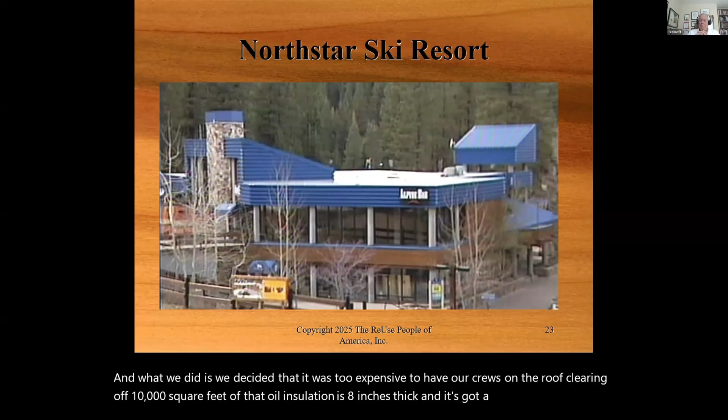We decided it was too expensive to have our crews on the roof clearing off 10,000 square feet of insulation that's 8 inches thick, with a rubberized base and a rubberized top. Our whole crew would be up there for almost a week just trying to clear it.

We did the calculations, got an engineer to support it, and were able to put a bobcat up on the roof with the driver. We cut a hole in the roof in one corner of the building and put a 40-yard roll-off below it. We had the entire roof scraped off and ready to start deconstruction by the next day.

Going back, because that was built on a 16 by 16 foot grid, we cut the roof off from the top in 16 by 16 sections, right over those columns. We did the same thing on the second floor, then used a 40-ton crane to come in and pick that floor section up and set it on the ground.

That way, other people could be working other parts of the building while we were deconstructing, without needing safety equipment and fall protection in that area. Obviously, we still had hard hats and that sort of thing, but it certainly improved the efficiency of the operation.

It was a restaurant, childcare facility, and ski rental shop originally, as I mentioned, 20,000 square feet. We charged $134,000 for the deconstruction, and we deconstructed it down to the concrete poles and the concrete slab it was based on. There was no appraisal of the materials because the ownership structure made it too difficult.

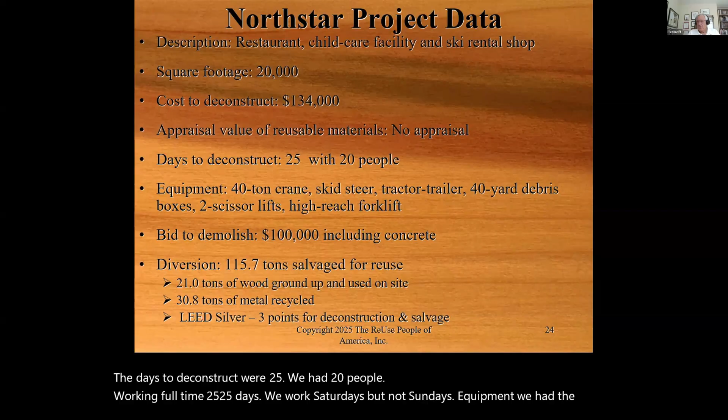The days to deconstruct were 25. We had 20 people working full time, and we worked Saturdays but not Sundays. For equipment, we had the 40-ton crane, and you could see the rest of the other equipment — high reach forklifts, scissor lifts, etc.

The bid to demolish was $100,000, so we weren't far off, and that's typical. In the residential sector, deconstruction is 2.5 to 3 times more than traditional demolition. It's nowhere near that in the commercial sector — 1 to 1.5, maximum 2 times more.

What else? Oh, there's a diversion. We had 115 tons salvaged for reuse. In addition, there were 21 tons of wood ground up and used on site as mulch, since they wanted to protect it. And there was 30.8 tons of metal that was recycled.

The organization received a LEED silver rating for that project, primarily because of 3 points they had gotten from deconstruction.

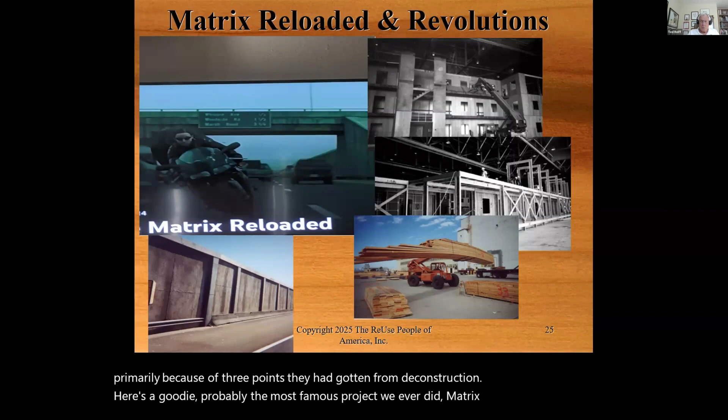Here's a goodie. Probably the most famous project we ever did: Matrix Reloaded and Revolutions was filmed in the county of Alameda at the old Alameda Naval Air Station, which had been decommissioned. This was filmed on the old runway — they blacktopped it and put the road markings on it. There were 3 major sets; I've got photographs of just 2 of them here.

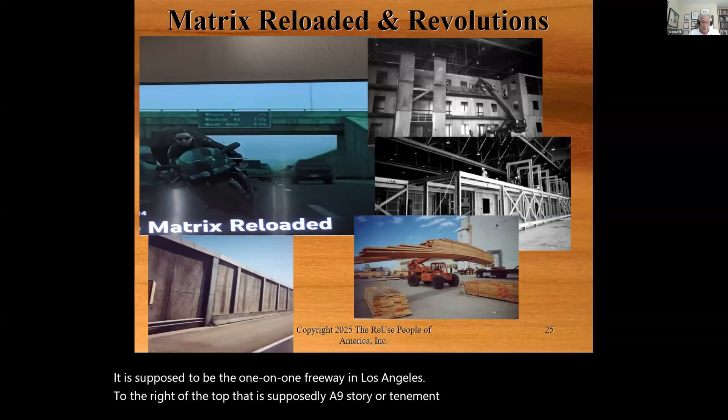Obviously, the one on the top left is right from the movie — it's supposed to be the 101 freeway in Los Angeles. To the right at the top, that's supposedly a 9-story tenement building where our hero Neo was fighting Agent Smith in one of the opening scenes. Smith was duplicating and triplicating himself, but of course our hero won.

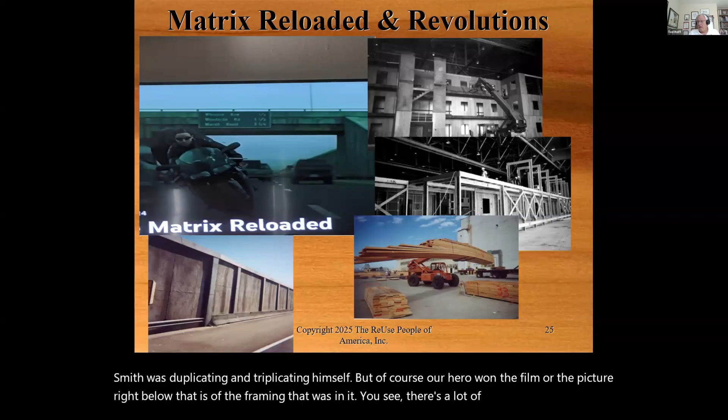The picture right below that is of the framing that was in it. You see there's a lot of truss joist in there, and the walls were strictly Luan over 2x4 and 1x4 framing, so there wasn't anything particularly solid except for the flooring, obviously.

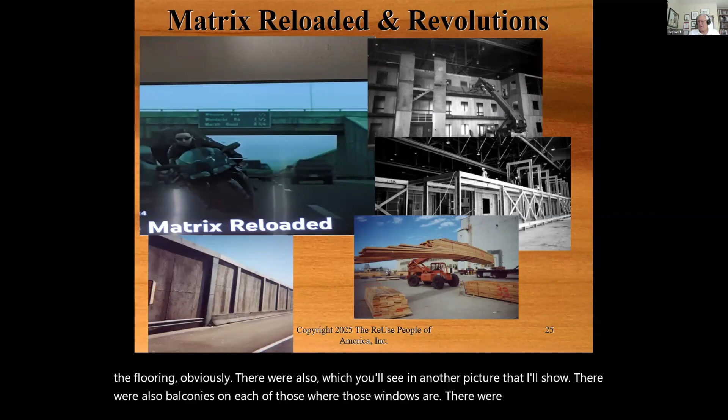There were also, as you'll see in another picture I'll show, balconies on each floor where those windows are — steel balconies. I think there was a total of 35 or 40 of those steel balconies, which we did salvage.

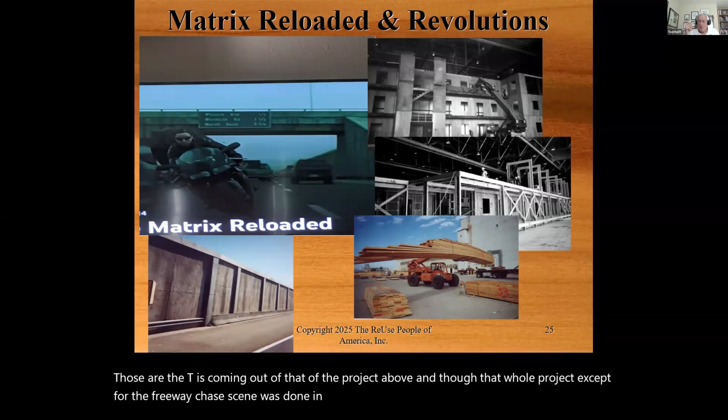Keep an eye on that bridge up above in the upper left. Oh, I'm sorry, in the bottom right — those are the TJIs coming out of the project above. That whole project, except for the freeway chase scene, was done in one of the hangars where they built, rebuilt, and refurbished the military aircraft.

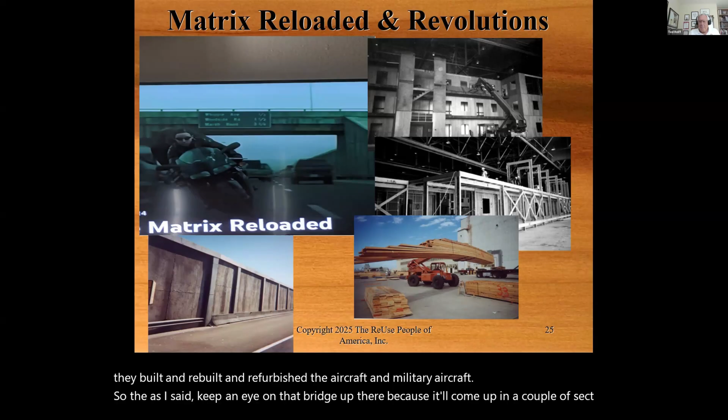So keep an eye on that bridge up there, it'll come up in a couple of sections. Below that looks like a concrete wall. It's not, it's OSB sprayed with gunite. They're built in 16 high by 16 wide sections, made of 2x4s, but the 2x4s were notched for 1x, which I'll probably show in another picture here.

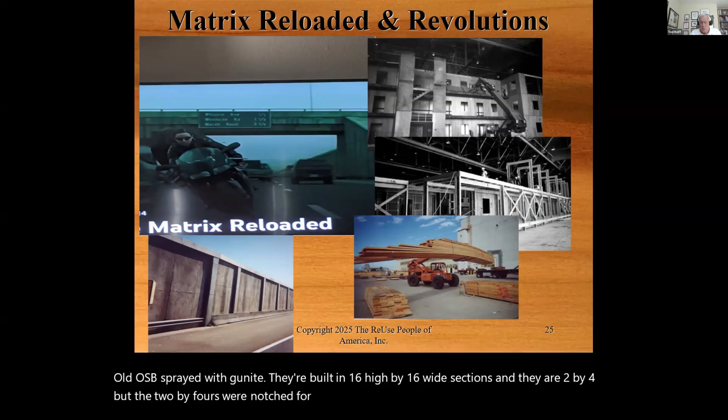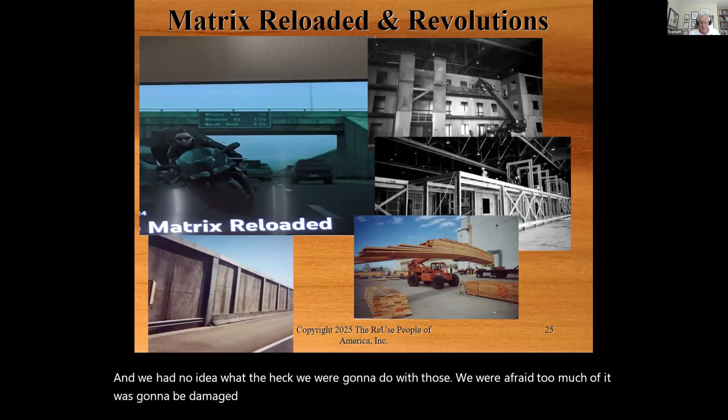We had no idea what we were going to do with those. We were afraid too much of it was going to be damaged. But somebody had an idea, and it wasn't me. I wish I could claim it.

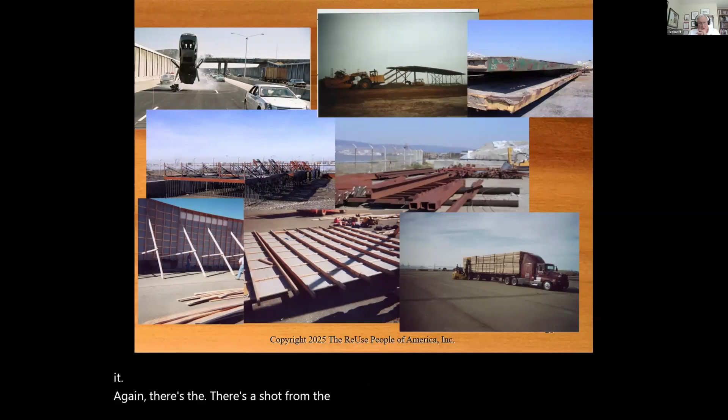Again, there's a shot from the film in the upper left. You see those concrete barriers, supposedly, and the bridge in the back. If you notice, right on that car that's flipping over, there's a truck crossing the bridge. That's a semi. This bridge was built to DOT standards, and there was traffic all during the movie going back and forth across that bridge.

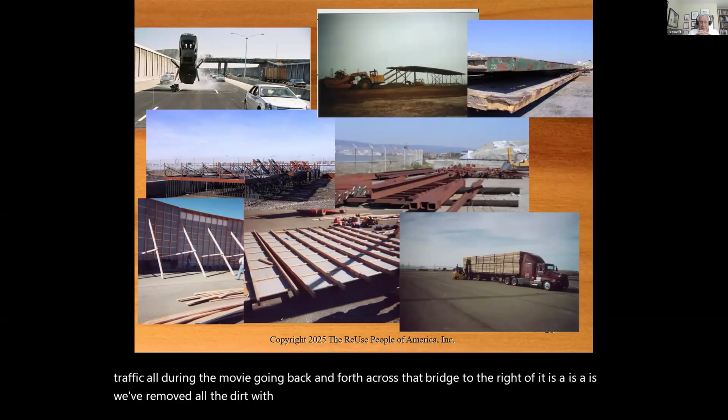To the right of it, we've removed all the dirt with front end loaders and by hand, and with that earth mover. And to the right, those are parts of the bridge. The bridge was made with...

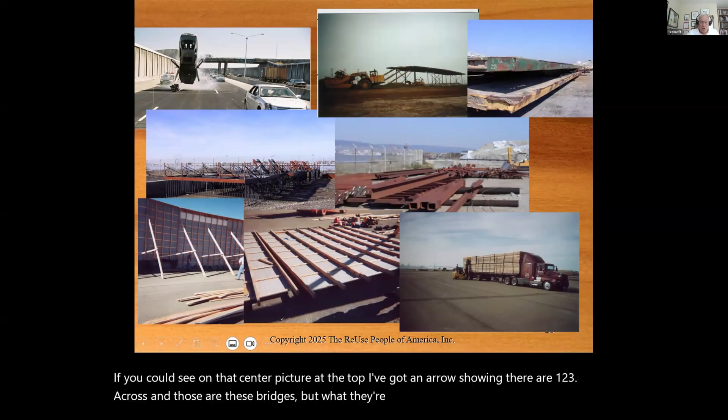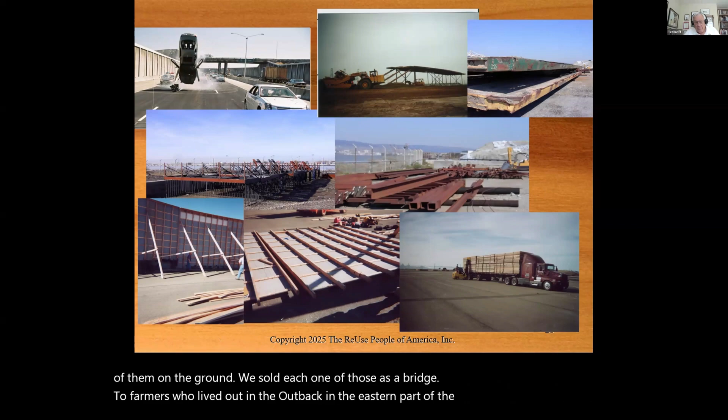To the right then is a stack of them on the ground. We sold each one of those as a bridge to farmers who lived out in the outback in the eastern part of the state that had a lot of swales and gullies and that sort of stuff. I'll show a picture of that in a moment.

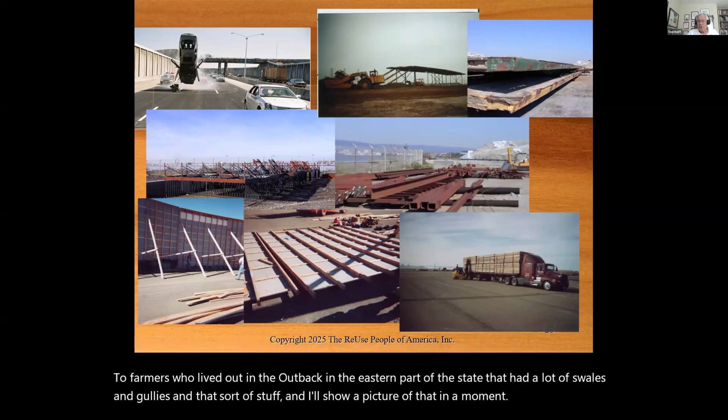Below the car chase - let's go back. These are the steel, what I call the balconies from that one picture, and they're just upside down. We brought all those back to our warehouse. We sold all the steel support for the bridge.

We sold it all on site. We sold these bridges themselves - we sold those on site too.

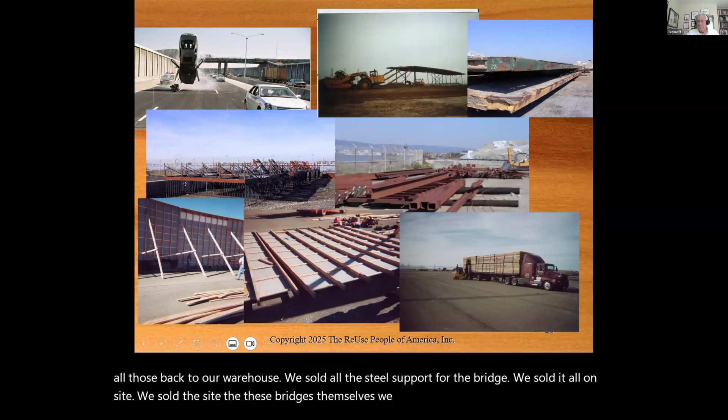Going back to the wall, this is where it gets very interesting. So you see the 2x4s, 16 feet tall. The 1x4s are notched in running across.

So deconstructing it, we knew we would ruin the OSB, but we also knew the 2x4s were ruined because they were notched out. The best we could probably salvage were these 2x6s as supports. There were 2 on every section, a 2x8 on the top and a 2x8 on the bottom for top plate and bottom plates. That's what we could save - the 2x8s and the 2x6s - and that was it.

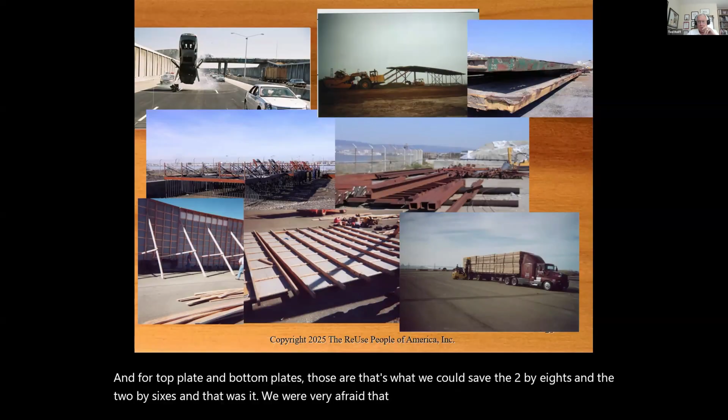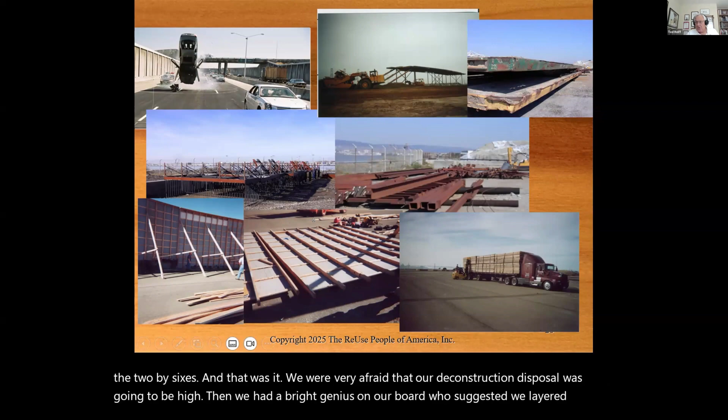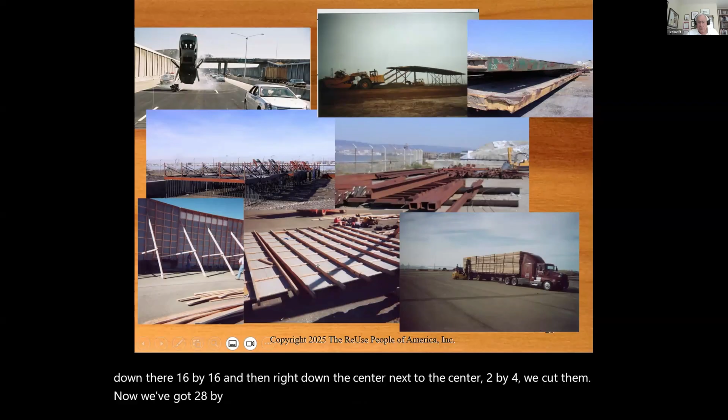We were very afraid that our deconstruction disposal was going to be high. Then we had a bright genius on our board who suggested we lay these down, 16 by 16, and then right down the center, next to the center 2x4, we cut them. Now we've got 2 8 by 16 sections which we folded together.

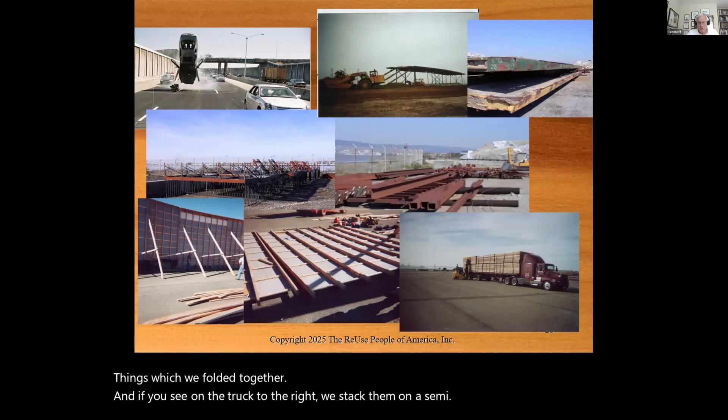And if you see on the truck to the right, we stacked them on a semi, and we were able to truck them out. Where would we truck them?

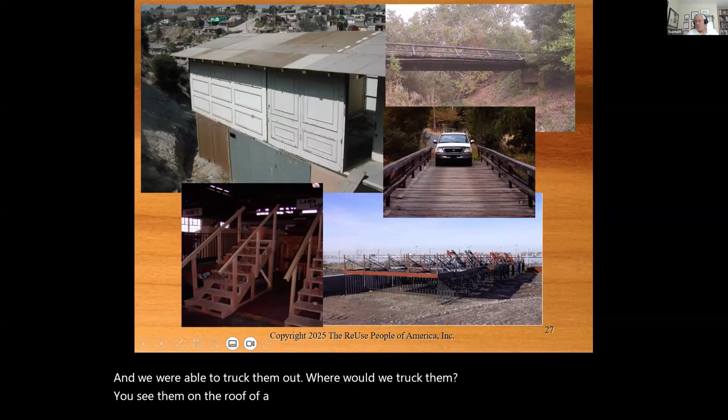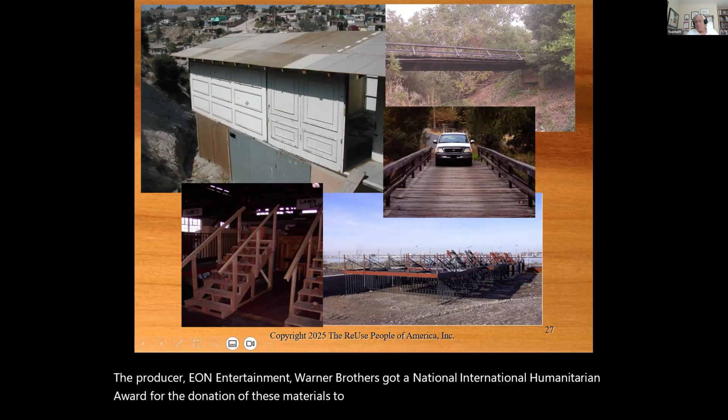Upper left, you see them on the roof of a 2-story garage door house in Tijuana. The producer, Eon Entertainment, Warner Brothers, got an international humanitarian award for the donation of these materials to some nonprofits that constructed these houses in Tijuana.

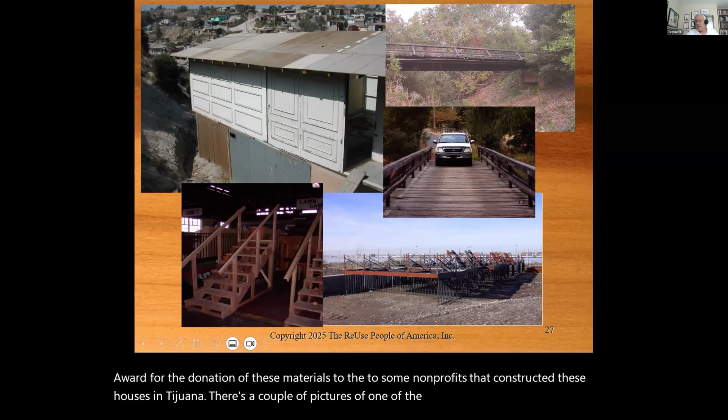There's a couple of pictures of one of the railroad cars. There's my car in the center of it, just to show you it is for real. There's another picture of the balconies, and then these were stairs for the actors that were behind the set and so forth. There were a bunch of those that we saved.

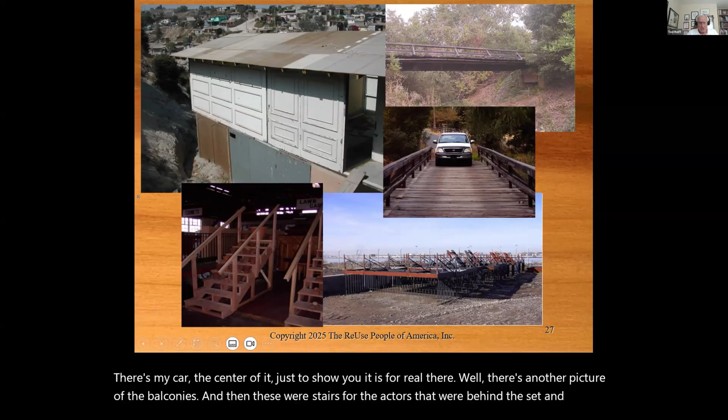So, well, we also had to rejuvenate.

It was a least tern nesting area. So all that ground that we had dug up and where the bridges were and so forth, we had to reseed all of that, replant it, and put it back into a least tern nesting area. Our diversion was the highest we had ever had in any building we had done so far, residential or not.

It was 95.2% diversion. 180 tons of lumber, 1,500 tons of steel structure. That included the bridges. 1,000 cubic feet of expanded polystyrene. That, of course, didn't weigh anything. And the big one was the tons of concrete, because if we can go back, I'm going forward. Here we go.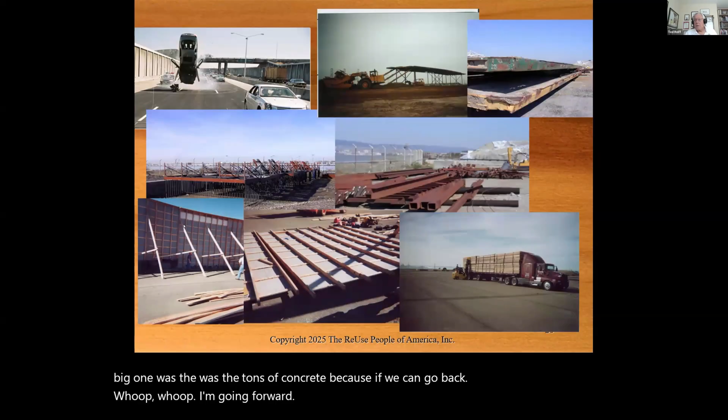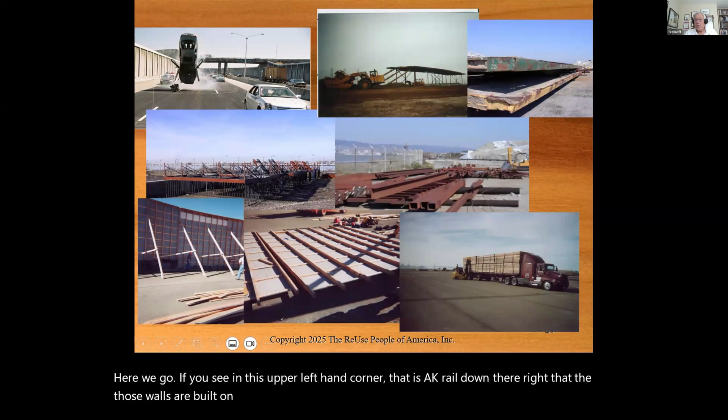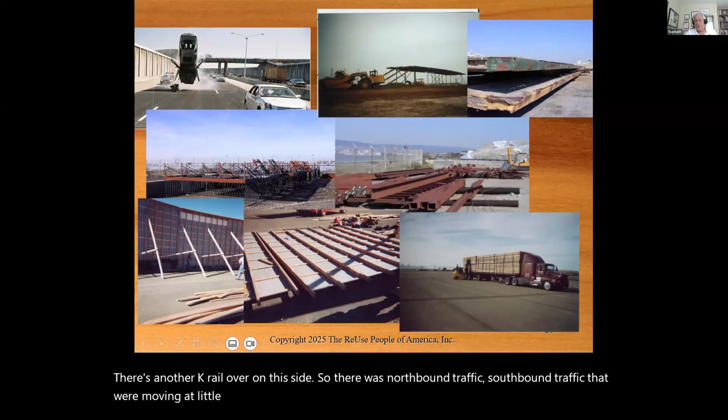If you see in this upper left-hand corner, that is a K-rail down there, that those walls are built on. That's a center K-rail. There's another K-rail over on this side. So there was northbound traffic, southbound traffic that were moving at a little over 60 miles an hour. So there was a real danger of somebody losing control and really doing some serious damage to people and the set. So that was the reason for the concrete.

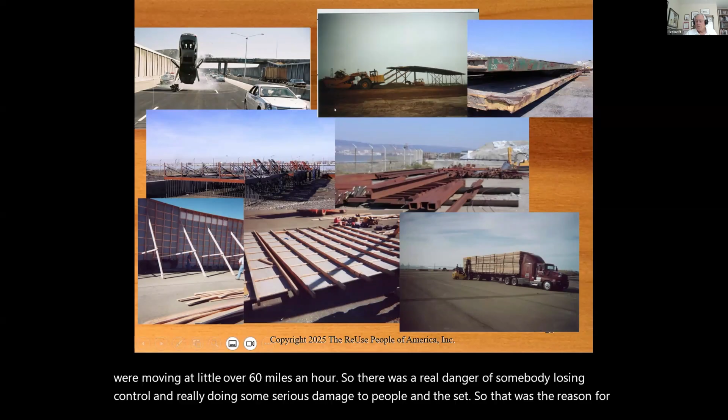Here's some focus on training. Not contractor training, but this one came pretty close to it. Here's what we did. This came from Harlingen Air Force Base, down in Harlingen, Texas, which is right off the Rio Grande in southeast Texas. It was an Air Force base for training navigators. It was given to the Texas State Technical College, but the buildings were still on it. Well, not all the buildings. The barracks were on it. There were 13 barracks, and the

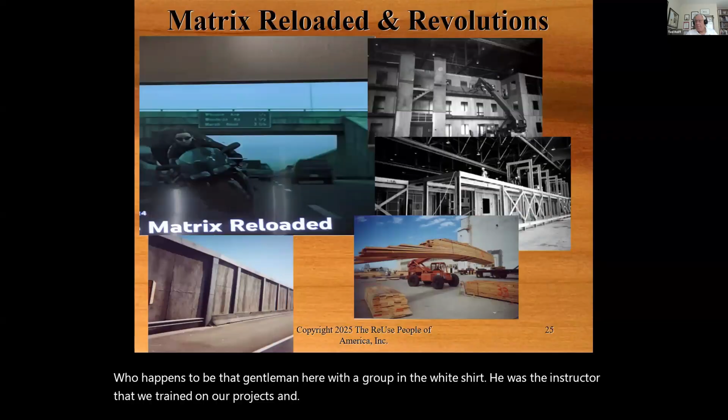Oh, well, I'm not good with my fingers today. Where are we? Come on, training. I think you're going in the wrong direction. Jake, who was the pilot? Wrong way, Corrigan. That's me. There we go. Also, we have a bunch of questions popping up. So if we could hopefully wrap up in about 5 minutes to hold some time for Q&A. Sure. Yeah, yeah. This is it.

So that was the training. Then we had other trainings that we had given, but the beauty of this particular training is all students who passed our test, and we give both a verbal and a written test to all the students. Those who get 70% or higher get a certificate. All those who got a certificate, and all got them but one person, were all hired by the school permanently in the maintenance and building departments. So it was quite interesting.

This is a residential training we did, the first training we ever did in Muncie, Indiana. We did a bunch of these. We trained another person to continue. The results of this one: there were 4 training sessions, 42 students.

Here's a guy we trained, was a furniture builder and a contractor, completely deconstructed 4 houses. All the students were on home release from the Delaware County Correction Center. 30 of the 42 students, or 72%, were full-time employed by the end of that session.